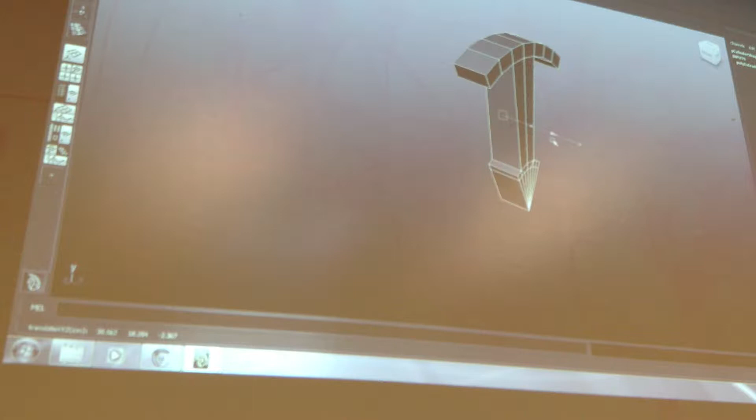I'm going to add just a tad bit of thickness to it. So if I click on just one edge, it'll give me the whole border edge on this one. And just slightly extrude this out to give me a little bit of thickness to work with. Okay? Now when we go and we duplicate this object back around on itself, I want it still to have nothing in the inside. It needs to be hollow.

So any place where it's going to reconnect back to itself, I need to delete those faces. So I'll just get rid of those. Okay. So that's our one section of the rim. Okay? And I also chose the spoke. Again, I didn't choose one that was at an angle or anything like that. I chose one that was perfectly set on axis. Something that I can easily manipulate, staying true to the axis that I want to manipulate.

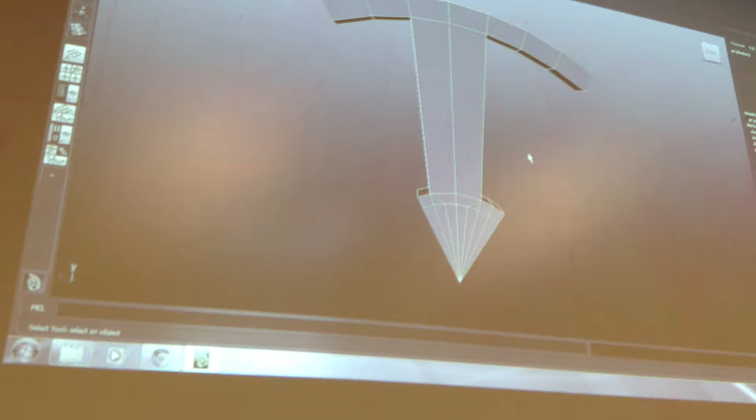So I can add some volume to this moving forward quite easily. If I need to taper it in at all, I know I'm working in a symmetrical manner where I don't have to fight against the world scaling or the object scaling. It's right on the origin. Okay.

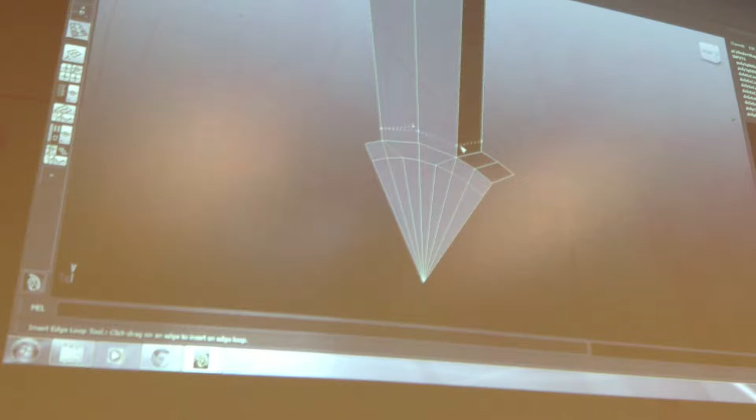So when we go and we smooth this, we can see that's not holding its shape. I'm going to add a few edges in to help it hold that shape. Probably need one right here. Probably one right there. Maybe right there. And maybe you need something like that. Okay? You can see that's holding its shape a little bit better. And I could go and I could do the other side if I wanted to.

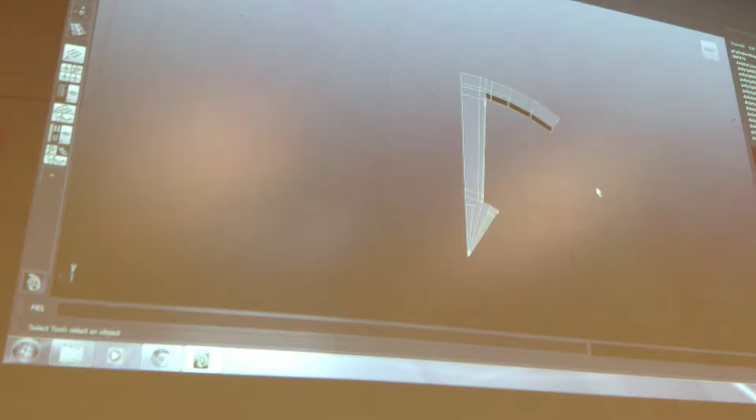Or I could just get rid of this side, and essentially I'm working on now a 1/12 of my rim, right? The only thing I need to remember is when I dupe this to the other side, when I mirror it, I need to get rid of the excess. I need to get rid of one division here, and I need to also get rid of one division here because there's an odd number. So I only need one and two within this area. So these two over here and this one. If not, they're going to be on top of themselves.

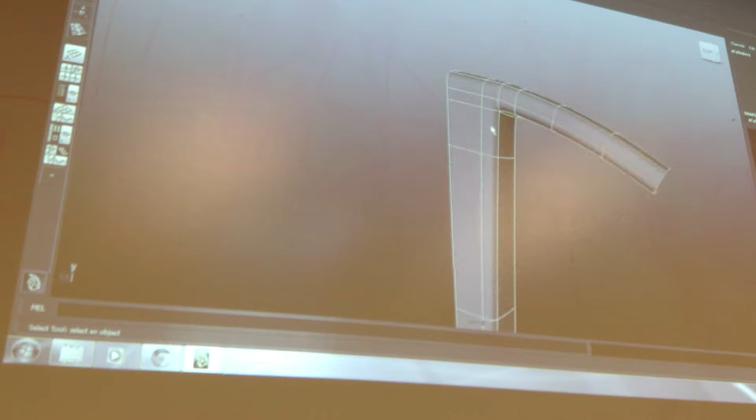Yeah, John. Those vertical edge loops, won't that cause that same problem we had earlier about the roundness? Yeah, so you can already see that, right? You can see that's pinching up there a little bit. You see that's not round right there, right? So what I need to do is put an edge in that will allow me to condense my geometry or de-res it before it reaches that edge. Okay? So if I can de-res it before it hits the arc of the cylinder, it's not going to affect it. So let's do that right now.

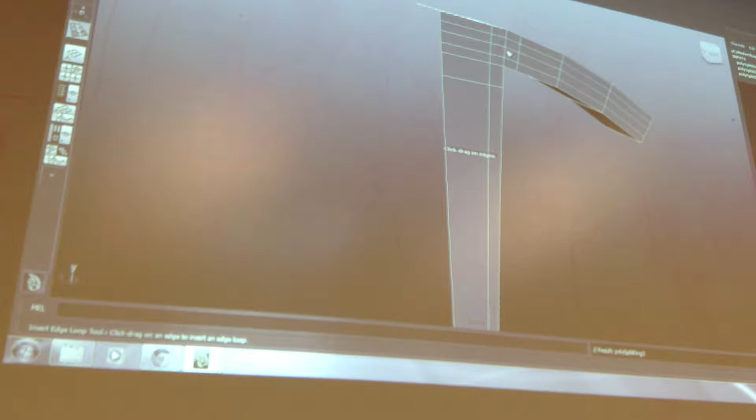I know I'm going to need an edge somewhere in here for it to hold its shape there. At some point we know it's going to need one there, but I need to prevent it from getting to that edge. So I'm going to put an extra edge in the center that's going to allow me to de-res. Okay? This edge here, I don't want to touch. This is allowing it to hold its shape in this area. But this extra one again in the center is a great place for me to collapse my geo.

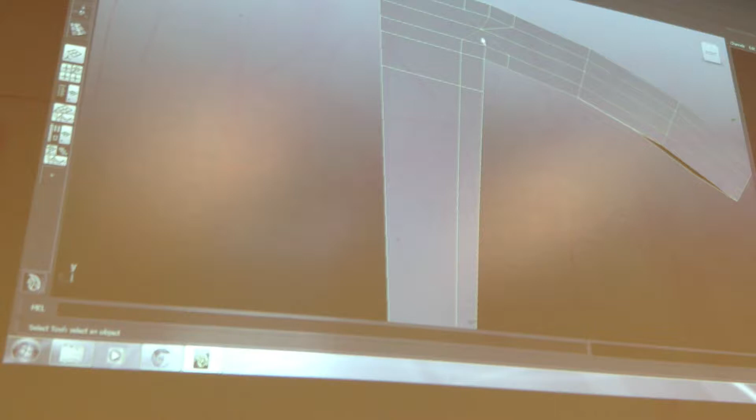Anytime there's three edges along, right? You got three vertices and you have three edges, you can always pinch them together, delete the center edge, which this is a quad, it's just ugly. And then you can easily get rid of the two on the sides. So you've taken three and you've collapsed it into one, remaining quads.

And when you choose which one you collapse to, depending on how your geo's routed, you always want to leave the edge that was there from the initial cylinder, because that's the one that calculated the position it needs to be at, the distance from one to another to actually form a perfect cylinder. So I want to get rid of the ones on the sides. If I kept one of these, it's not going to smooth correctly. So I'm just going to get rid of these. We should notice that should keep our cylinder shape. Okay.

Does that make that good? So where does that edge loop go? The one that's... This one down here.

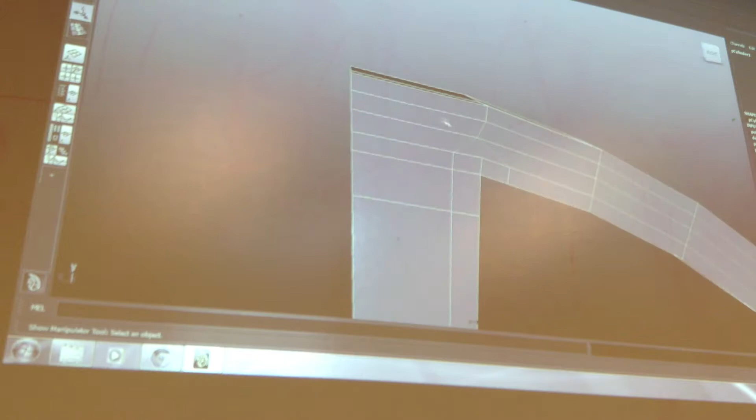I mean, on the top, there's like one up yet. Here? Yeah. That one's just chilling back there for right now. Is there a backside to this? No, not yet. Oh. A lot of times I'll just make one.

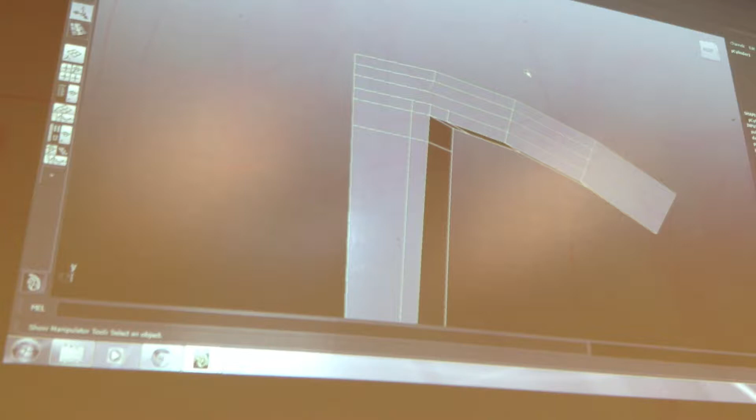Obviously the back part of a rim is a little bit different than the front a lot of times. I'll usually just start with the front, make as much as I need to. At some point I will dupe it and then create the back. That's if you're going to see anything. A lot of times the back is just really this simplified minus some of the kind of extra bling that you might see.

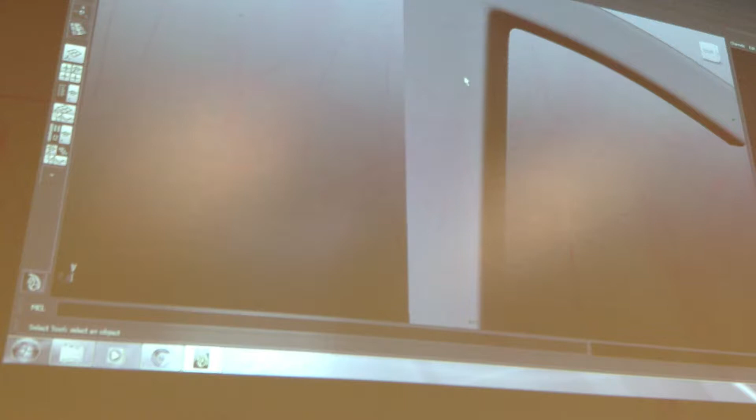Okay, so here we go, we're good there. I could fix this triangle problem here simply by moving this edge here, merging it, and deleting that one edge. Now I got another quad. I'm going to need a few other things. I'm probably going to need an edge in here. And on this, chances are, to soften this transition, I'm going to move this one down a little bit.

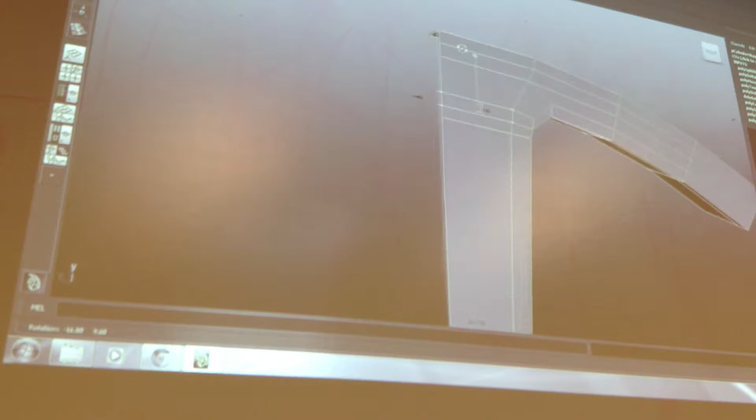That's not going to affect the curvature at all. This is all happening on a flat space. But just by moving that down, that should have a nicer curve than that part of the rim, which is how mine is. Okay. If you want to be real particular about that transition, you can see that those edges did pop a little bit, so I could take that one out and then re-put that edge back in, to give it a little bit smoother transition in there if you needed it.

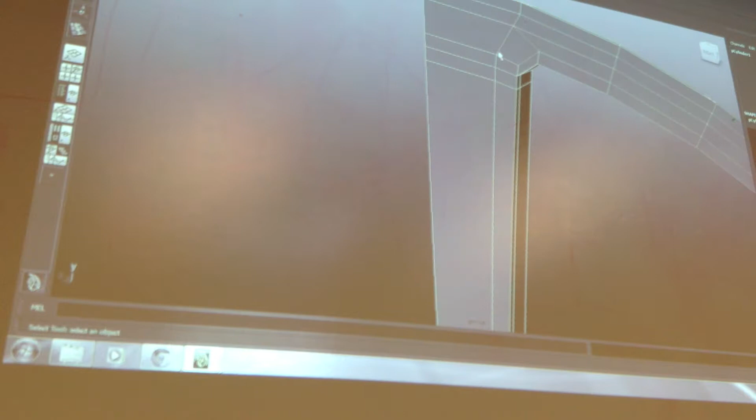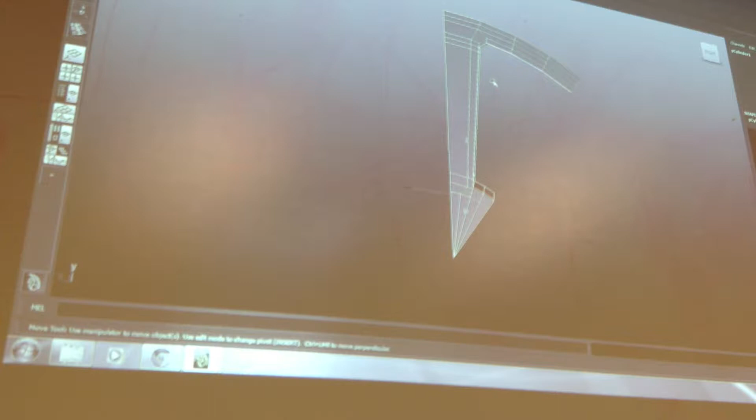Okay. You know, this I don't want to move. Well, actually, it wouldn't matter. I could move this one as well, where I'm going to dupe it, but I think I'm going to just keep all that like that. That's fine. Okay. And what I'm going to do here is I'm going to mirror this and give myself the other half that I needed.

I'm going to go ahead and combine that. And then you still have to merge it and get rid of the excess that I didn't need. So I'm back to 1/6 of my geo. Okay? Again, we probably have some issues there, which we should address.

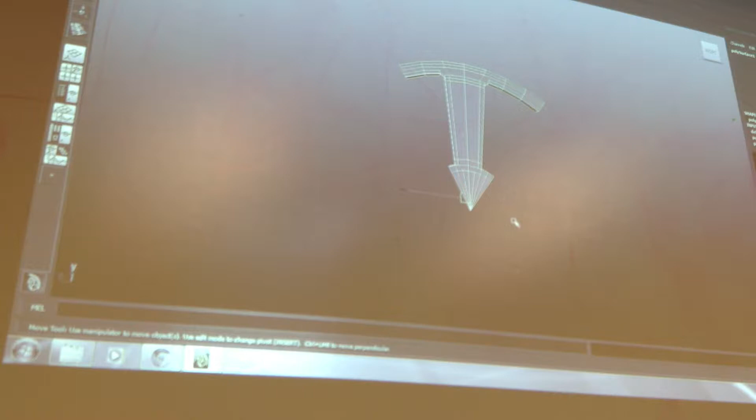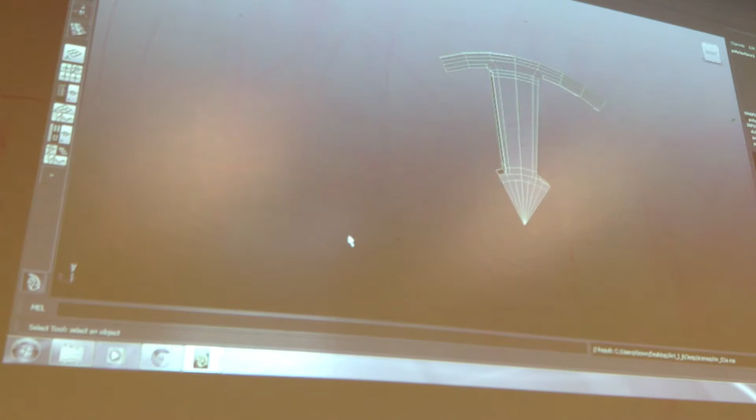I have a question. Yeah, Derek. Why did you delete that one edge on the other side if you've got two? It seems like you made it uneven. I did, yeah, because this here, you'll see, I'll just dupe one. So when I'm putting that around, that 5's an end there. You see what I'm saying? Yeah. So if I left 3 on both sides, because of how it was broken up, I'd have extra faces. Okay.

So I'm going to go ahead and dupe this, and there's a special tool to do that called Duplicate Special. It's just under Edit, Dupe Special, and I'm going to click on the little box. And all you do is, we worked on 1/6 of this. If you had 1/20th, you would calculate 360 divided by 20. Well, yeah, multiplied by pi and cubed or something. It's just however much you worked on, 360 divided by what part you did.

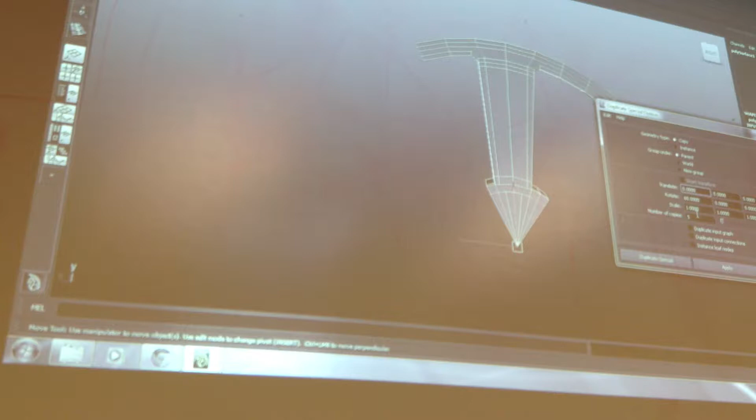Good. So I did 1/6, so 360 divided by 6 is 60, so I put that in the rotation, and you always want one less than what you need. So you need 6, I only need 5 copies, so I type in 5, and I dupe it. Now, these are all separate objects, they still need to be combined.

You do have the option to add them all as instances, which means if you changed anything on the one, it would also update on all the others. Some people like that. I honestly don't like it. I find that I can just work faster this way. But you can do it that way too.

When you're building your games and stuff, nothing really exists in the game space or in the engine. It all exists in a library or folder database type thing, and everything that's in the game is just an instance or a reference of what's in a library somewhere. It's not actually there. Okay.

They're cool if you want to work with them. I don't like modeling with them. Just be aware, probably when you're working in your game engine, that's how it functions. It functions and reads everything as an instance, which is a cool thing. So if somebody changes something on an object or changes a texture, next time you load your level, you don't have to go find the new texture, the new this or the new that. It will just auto-update because this is referencing what was being edited.

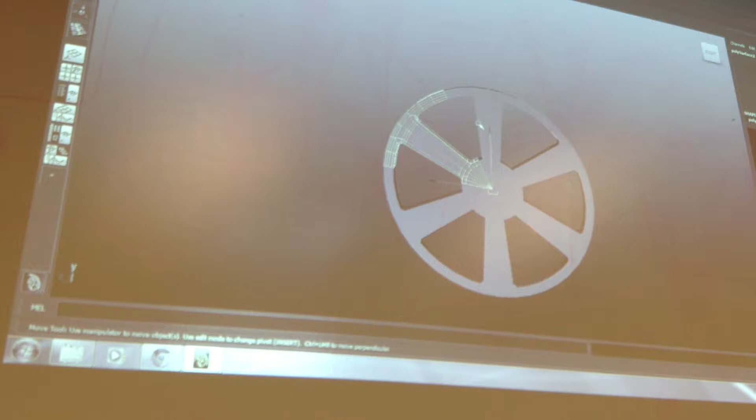You don't even need to know where it's at. Frankly, you probably won't even know where it's at. It's in 20 folders deep somewhere. But you just do it like this. So I'm going to go ahead and combine these, and merge those. Okay.

So you should see this is starting to look pretty decent. It's alright. It seems better. Me too.

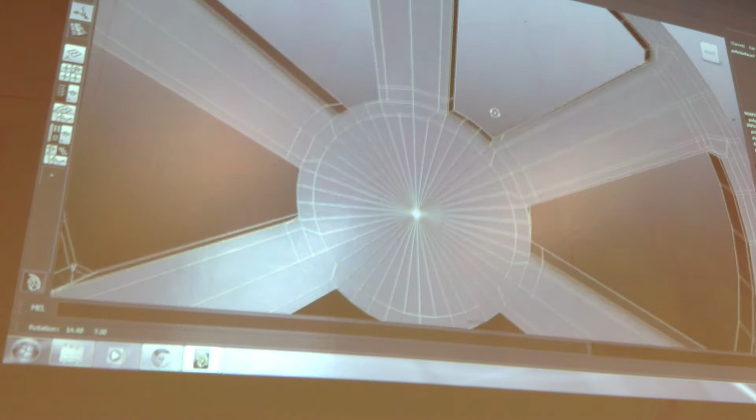The thing is, we can see that this has a little bit of an issue here. I can tell that that's not round. The reason why is I moved this over, so this doesn't have the correct amount of vertices for that arc in there, so I'm going to have to adjust that. I already know that. Okay. I also need to fix this area.

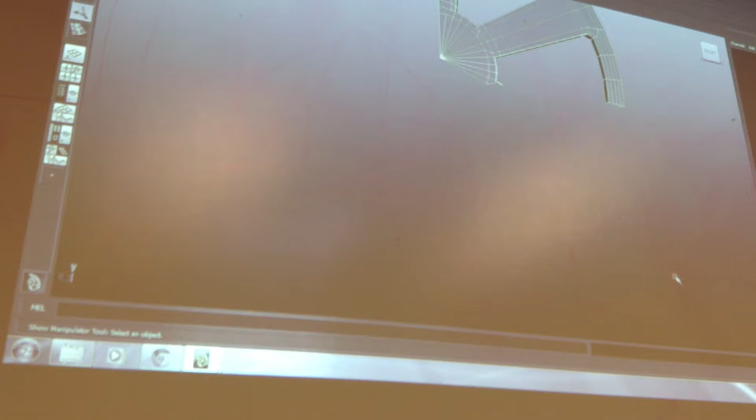But now that I have really what I want, I'm going to look at this probably a little bit differently now. And really what I want is one of these guys. Okay, so now I actually have the part, but I have a different 1/6 of my thing. And the reason why I want this part is I want to do what's in between the spokes, and to get this in here, it's a little bit easier if I have a full thing to work with. I think maybe not. I don't know. We'll see.

And for me, I like to have this thing kind of up where it should be. Even though this doesn't match anymore, I have this vertical, so that's the Assassin's Creed, my Assassin's Creed logo.

It's close, huh? Yep. Good job. Except it's upside down? I think it's upside down. Yeah. I can hardly tell. Just rotate your camera. Yeah.

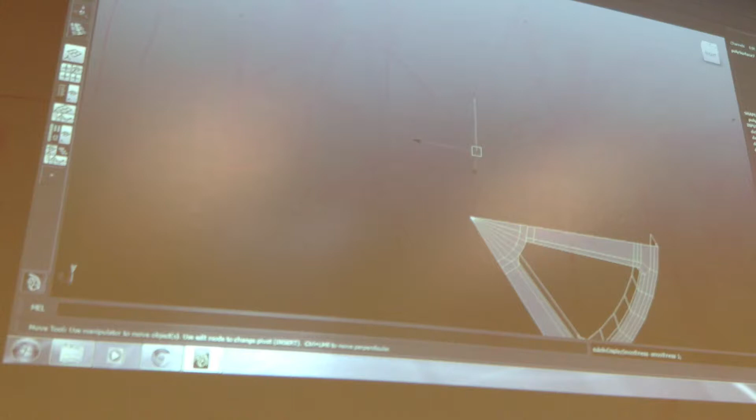So how do you set a pivot point for components? For what? For components? Like if you select a couple edges, how do you set the pivot point for that? Because every time I go out of the pivot point movement, it just resets the pivot point. So if I wanted to move the pivot for these, you just hold D, or you could do Insert and then snap it to where you want it. But yeah, it's per component.

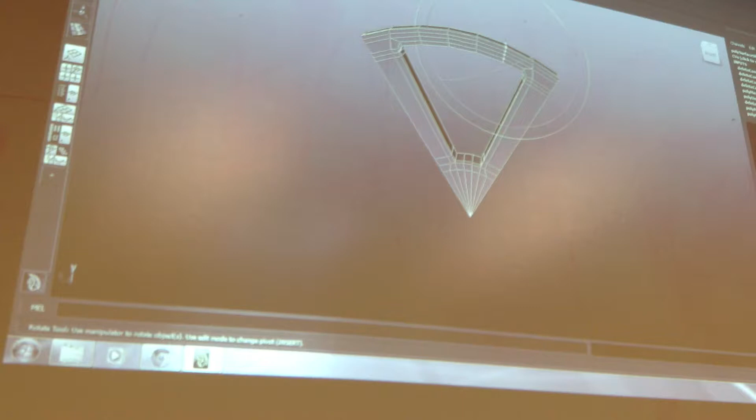So like if you move the pivot point of a component for the move tool, and then you switch to your rotate tool, it's not going to be there. So if you need to move the pivot for rotate, you need to go to rotate first, then move the pivot for that. They're all independent. And if it's acting funky after you do it, because by default it should re-snap back to the center of your selection, just go back into your tool over here and reset it.

Sometimes it gets even more of a problem, like it won't ever go back the way it should, and if that's ever the case, then the only way that I know how to reset it is you just save what you have, close Maya, and then reopen it, and it should be back to its normal function. But yeah, all those component pivots are not linked together. They all function independently.

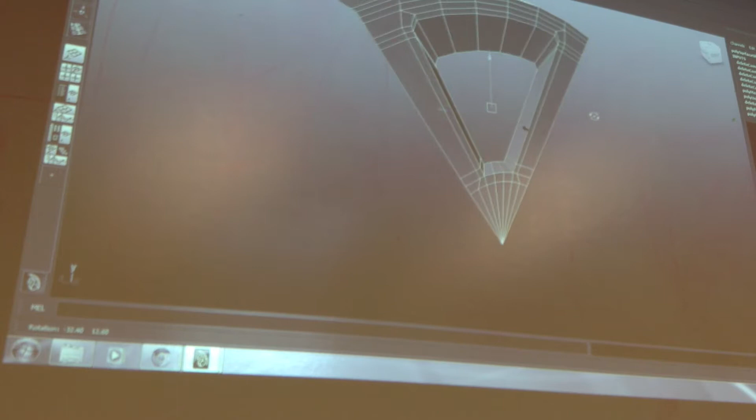Okay, so I'm going to get rid of those and grab this edge and scale this in a little bit. And I think I'm just going to attempt to line this up. Like that works. I think these, once I put that in, that's going to be a little close, so I'm going to get rid of those and just redraw that.

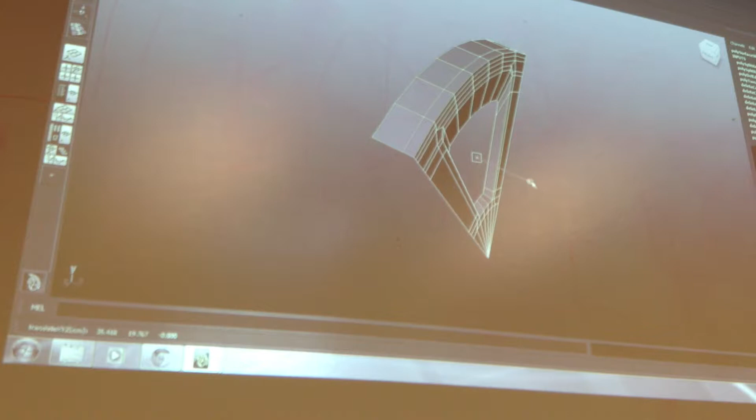Okay, so I just scaled that in to give that nice look. These probably, I'm trying to judge that, probably go back a little bit more. Maybe something like that. I got a bad picture, so I can't really get a full sense of how much depth it has, so I'm just kind of eyeballing it. Same thing applies regardless of what you're doing.

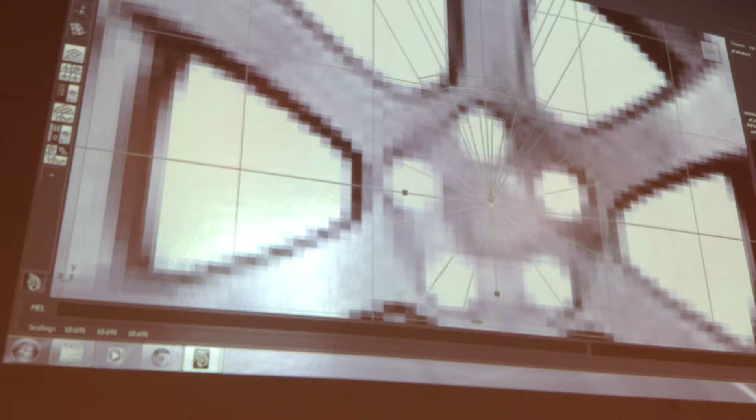I want to bring in a new cylinder so that I can fix that problem. Okay. And I know the issue is on here, so I just need to figure out, maybe it is 30, I need one here. So I just need to figure out how many.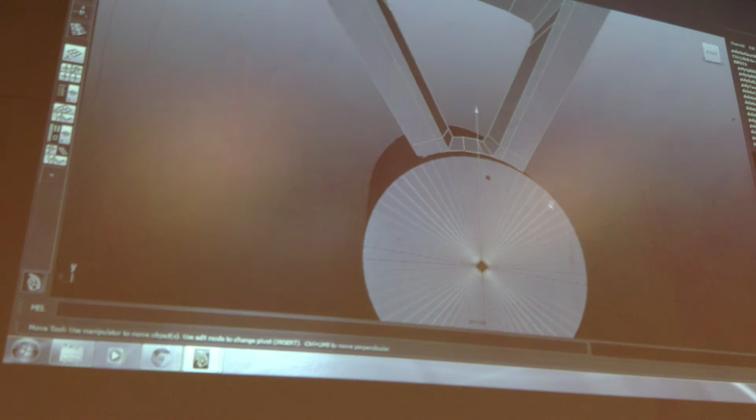And if this is something you want to be super particular about, you literally could take it and snap it to it if you wanted to. I think I'll probably be okay. Oops. And I'm gonna need to split this.

Okay, so I just have this lined up. And again, if you wanted something utterly perfect, you could just snap the vertices to your cylinder that you're using as a guide. Okay. So I'm going to go ahead and split this one down the center.

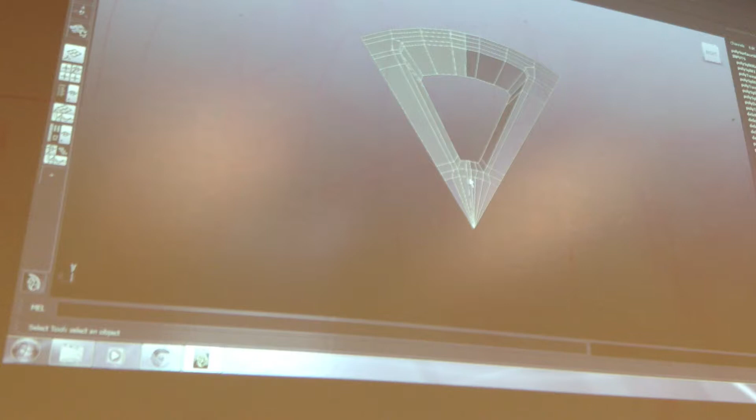How would you do that? The what? The split down the center. I just added an edge utility. So if you select any edge and then shift control right click, edge utility, edge ring splits it directly down the center in between the two.

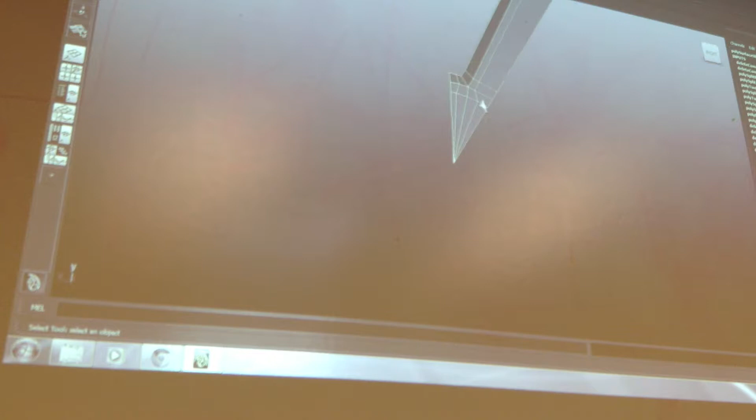I'm now going to get rid of these, and I'm back to. Oops, looks like I deleted something I didn't want to. Pull that back and merge it. So I'm back to what, a 12th again. I'll dupe these. Oops.

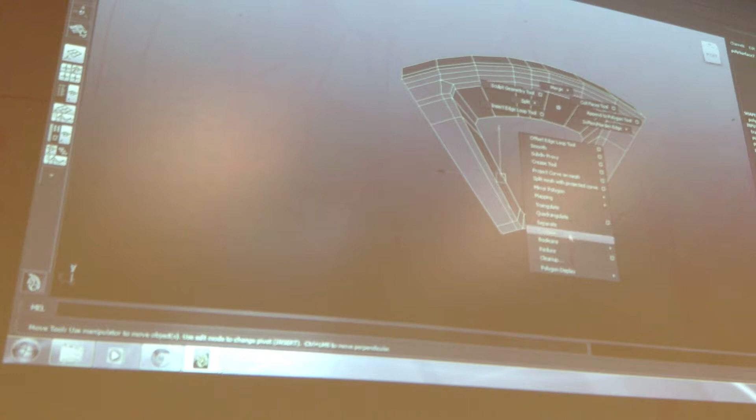I need to freeze that first. It's also rotating. So freeze this first. There we go. Dupe it. There we go. Combine this. Merge those, and then I need to get rid of this edge that I added to be able to mirror it, because that's something that would change its topo.

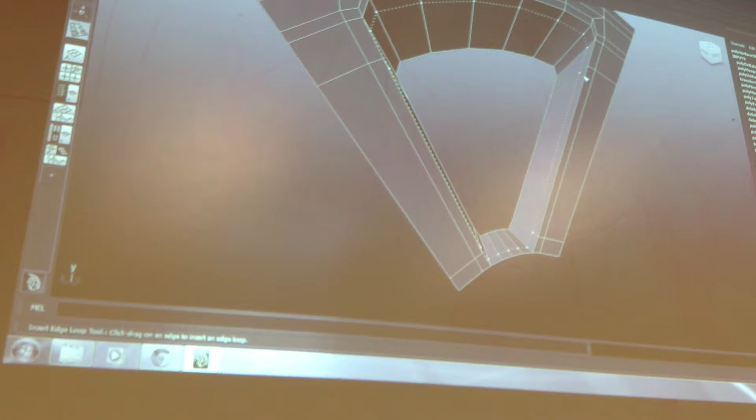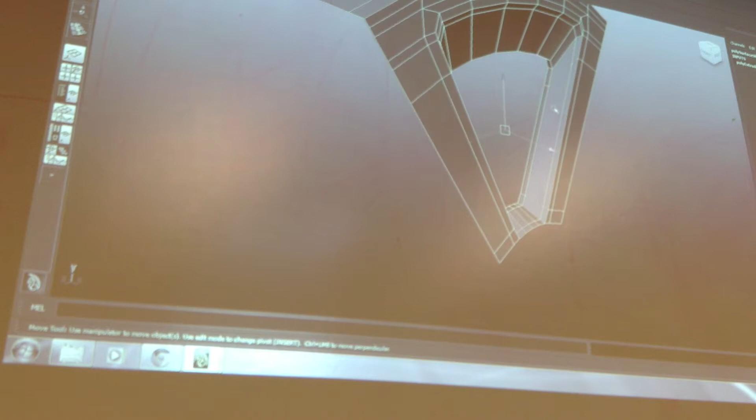I'm going to add one supporting edge right here. I think on mine I'm just going to kind of push that up just a little bit so it's a little bit more prevalent. Right there. You should be able to extrude out, bring out the rest of that rim. Did not need one there. Okay, so that's not too bad.

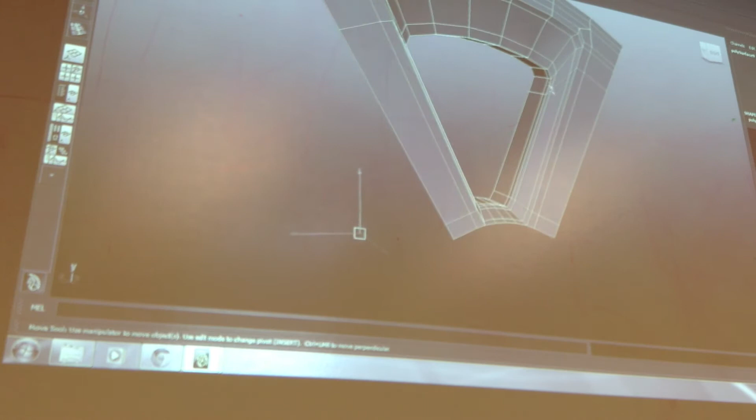Now that I have this one, I think I'm liking this. Oops, I moved that on accident. It looks like this next part, and this could just be the shadowing, does come down a little bit more, so I could bring it down like this, move the pivot here, turn retain component spacing on, and that's going to allow it to keep its shape here.

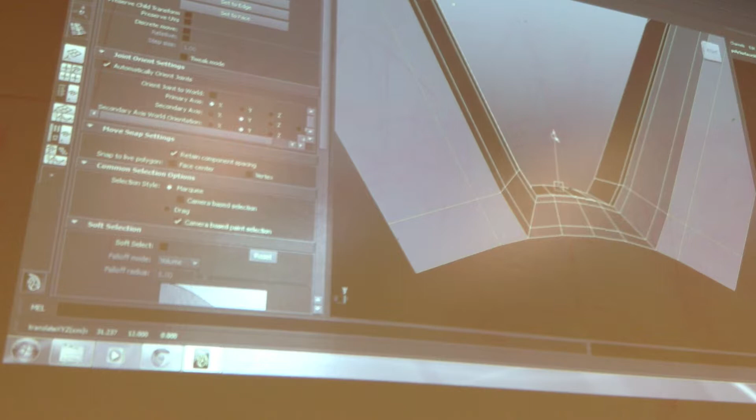So I want it to come down, but I want it to pretty much be planar with that. So it'll keep its slope, but I've moved it all down to match another vertex without having it all fall on itself. So maybe that's something you want to add. I don't know if that's a little bit more. I just eyeballed it. It looks like it's pretty good.

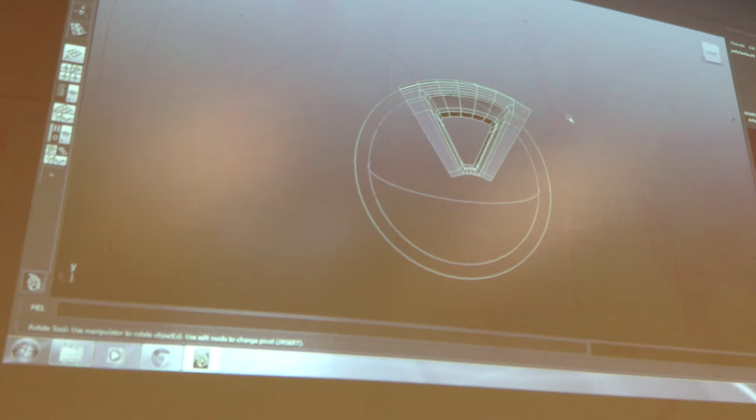Okay, so now that I feel like I have a decent portion of this rim done that I think is probably what I want, I don't need to go back into my dupe special and actually type everything in. It holds the last bit that you put in. So all I have to do is come down and click on dupe special. It'll recreate the rest of it based on the last inputs that you supplied it.

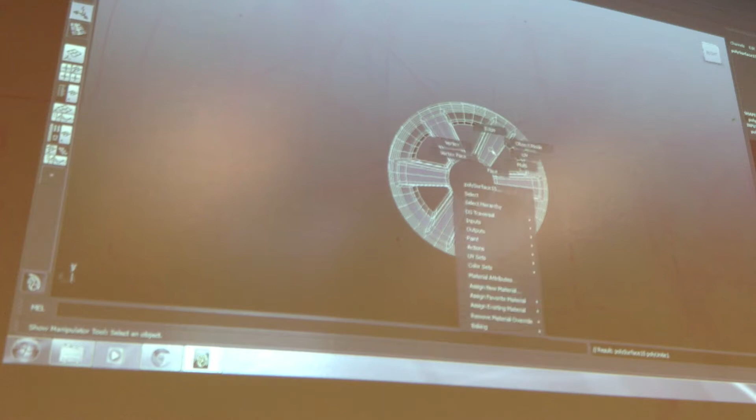Just combined it. Let's merge it. This should all be good. It looks like I'm actually missing vertices. I probably should have deleted that whole thing, honestly.

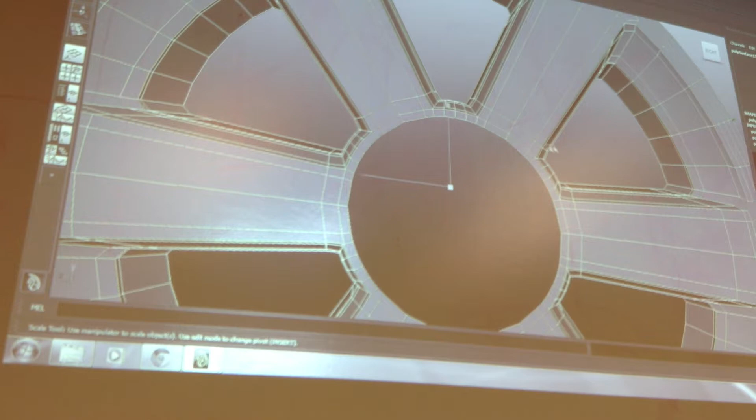So I have this part here, which for here is fine, but if I want to have anything in between, I would need to push this back. I would need to bring in another cylinder and make sure that my edge distribution was correct again. I think I'm missing one part that I wanted to add though. Let's see, rotate this. Let's rotate this 30. Actually, I'm missing before I dupe it.

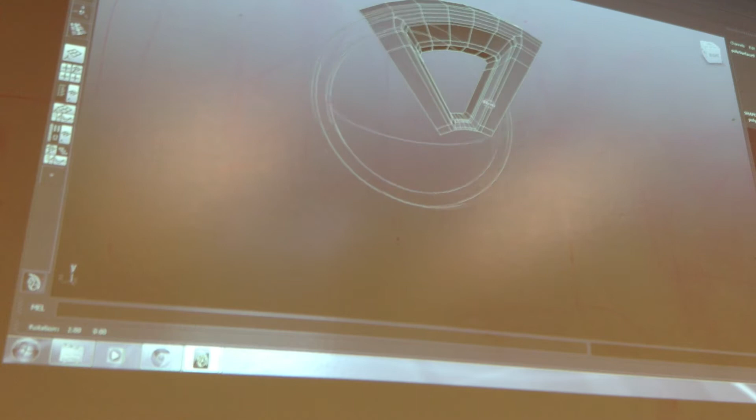No, we'll just do it this way. Okay. Just combine these again, and rotate this back up to 30.

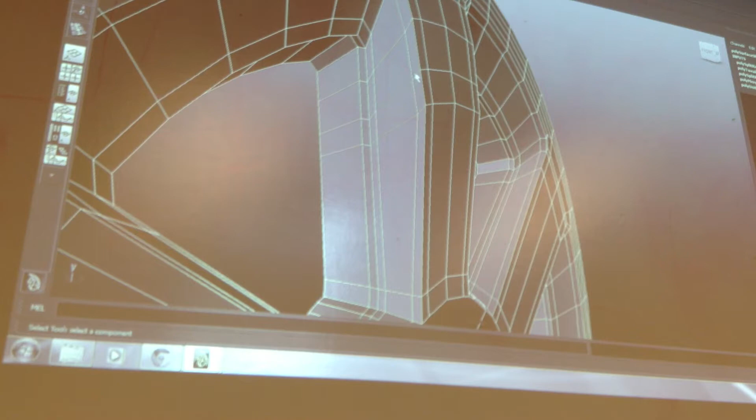Okay, if you wanted to add that cool little part on here that kind of comes out a little bit, I think it does something like that. I just want to grab just this part. I don't want to throw anything off behind it. So maybe it's like this. Okay. Okay, let me test that.

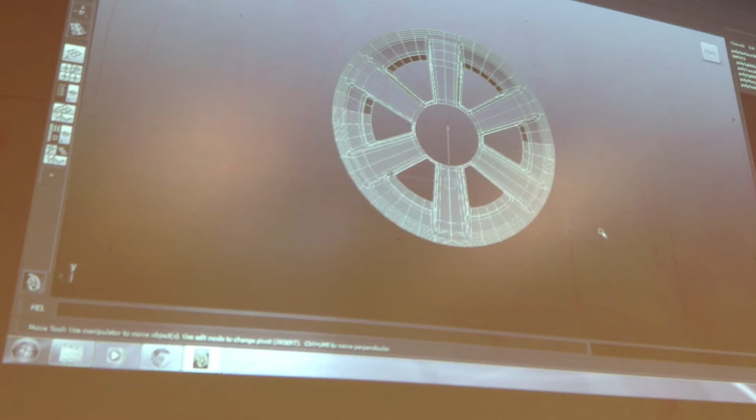Maybe it's just a little bowing action that you wanted to add for some reason. A little bowing action, yeah. And then I have the part that I want, if that's something I want to keep. Same thing, just get rid of the rest. Maybe this would be an actual instance where, if I had copy as an instance on, the rest of the parts would have also added that interactively.

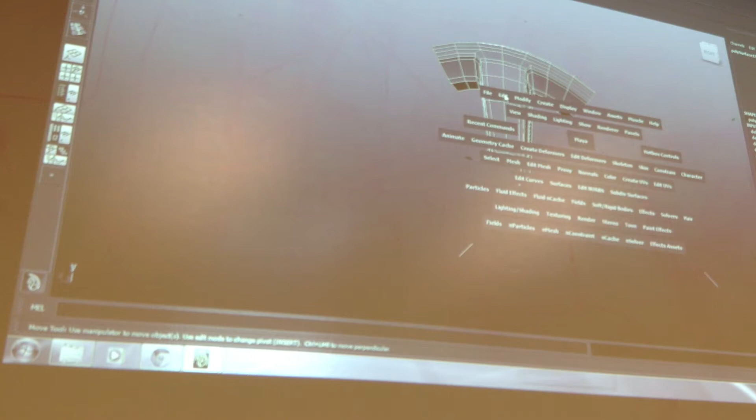At the end, I would still need to combine everything to one object, which you can do. I don't know, I'm just in the habit of going about it like this. It might not be the most optimal way. I think that's right. Duplicate special. Oh, looks like I missed one. Alright, I did one too many.

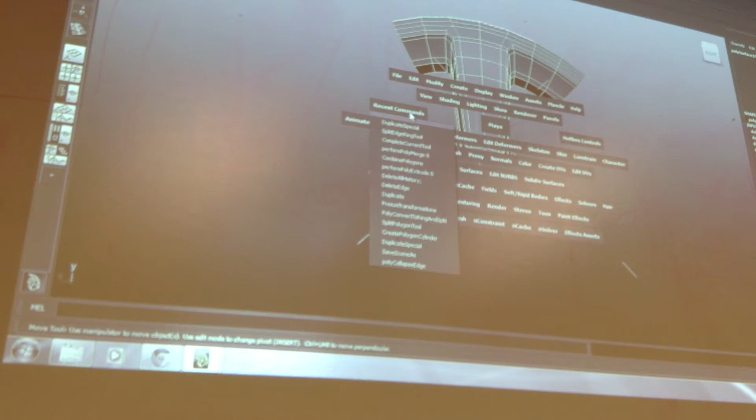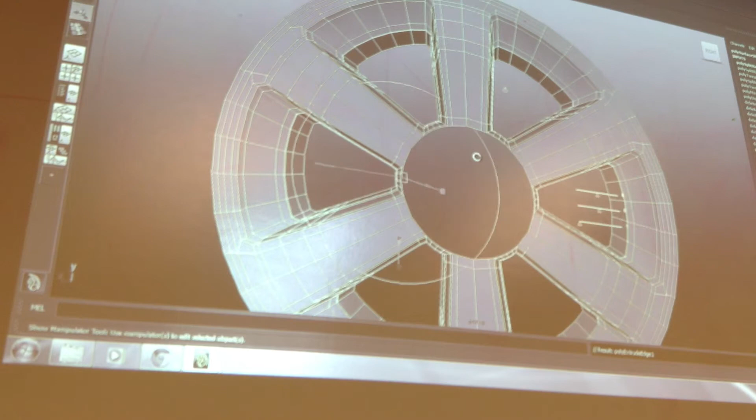Okay, and let's just bring this out just a little bit. We put another edge loop here. Something like that. And kind of shrink this in just a little bit. Probably needs a couple right there to hold it. So the thing is, I know there's going to be some type of cleanup that's going to have to be done.

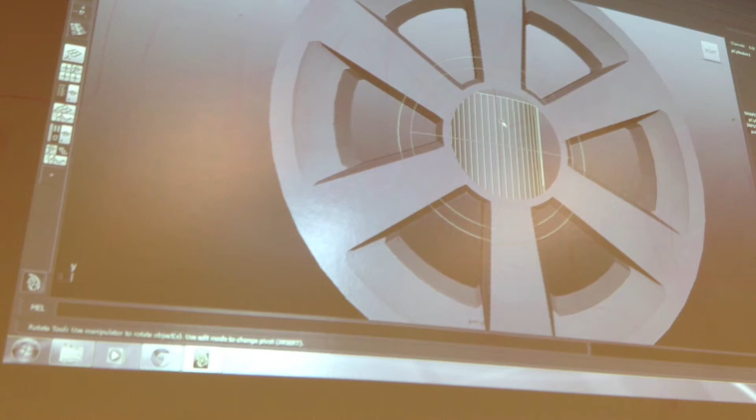I can easily click on an edge, double click, and it'll tell me up here in the corner, I have 48. So that's helpful. I can then just come in and bring in a new cylinder, and I know I need 48. So that's another thing that I use that for. And now I know where these edges need to line up.

So I'm going to go ahead and just click this back. And literally here I just need to grab and put these at the correct points. And I know it's going to be a cylinder again, and the inside. I don't need to do more than half. I can just double click if you have radial loop geometry again. I can select one edge, shift, double click the next one, and it gives me the whole edge.

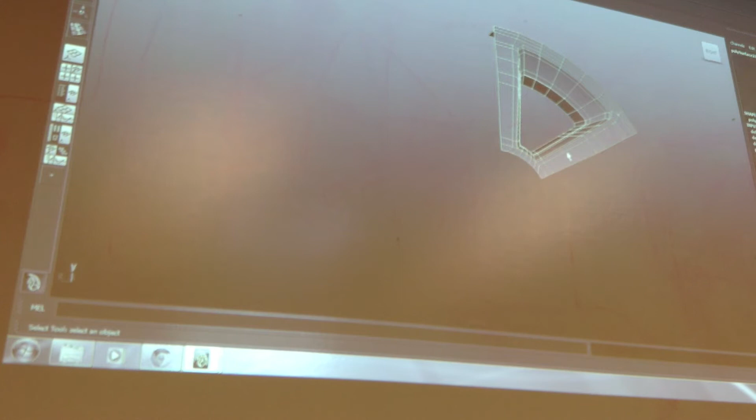Now these are not connected anymore. I can just double click anywhere, it'll give me the whole thing, and delete it. Now I just come back to recent commands, duplicate special, combine them, merge them, and we did all that. So now we know we're back to a perfect cylinder in here that we can use to do whatever you want.

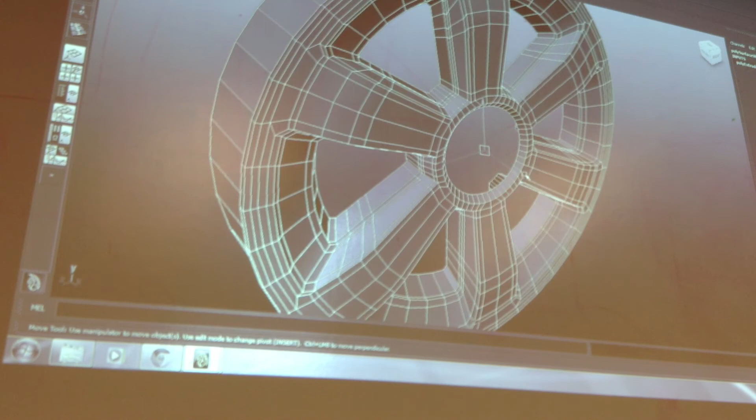Maybe just bring in a little bit like this and bring it on back. Maybe just add a couple cool little edge loops right here to have it hold its shape. Doesn't look too shabby. Cutting in the parts for the bolts and stuff, you might find that you're not able to boolean them.

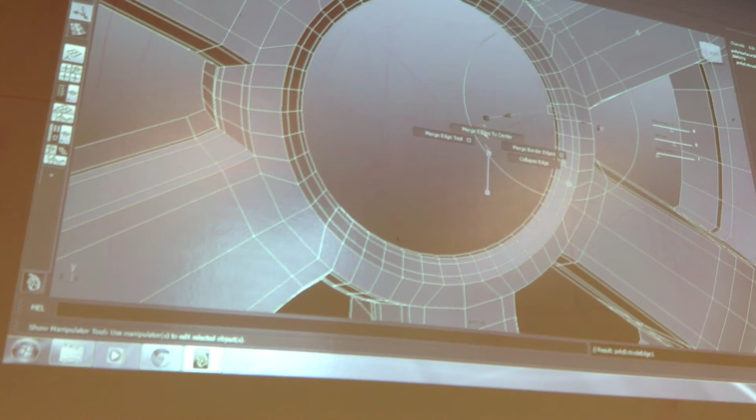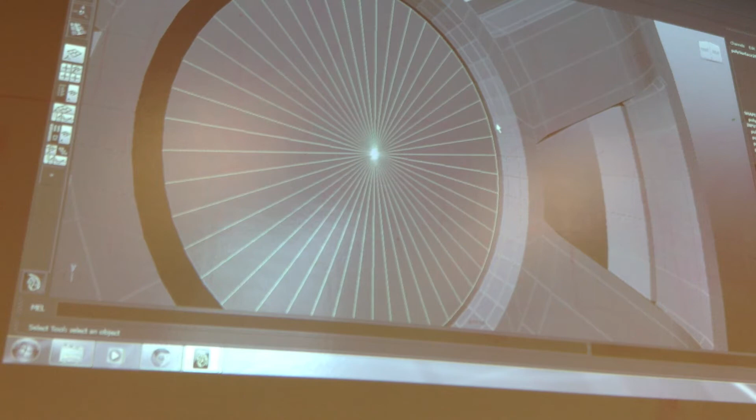So we could extrude, and say you try to boolean those points in and they're not working because it's too complicated. Just select the faces, okay? Extract faces, hit Q. I now have two separate objects. These vertices have to match up. They're gonna match up, I extracted it from them. Just don't touch them, right?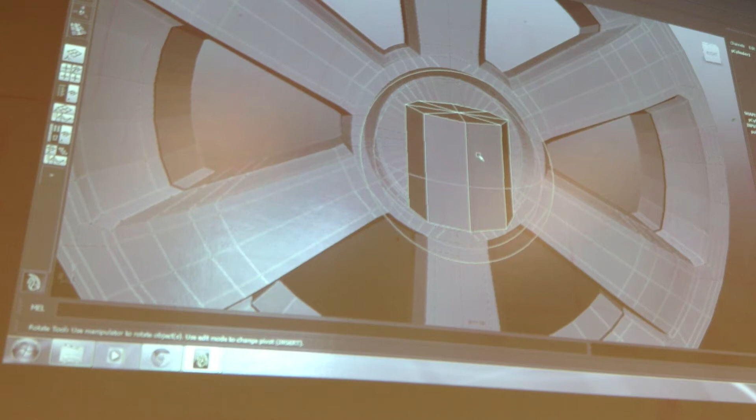So, actually before I do that, what would be smarter for me to do is bring this in. Give myself that, okay? So now I actually have some geo to work with. Bring in a cylinder. Give this something like 8 sides. You only need 8. And let's just try to line one up real quick. Okay, maybe this is where it's at. Okay.

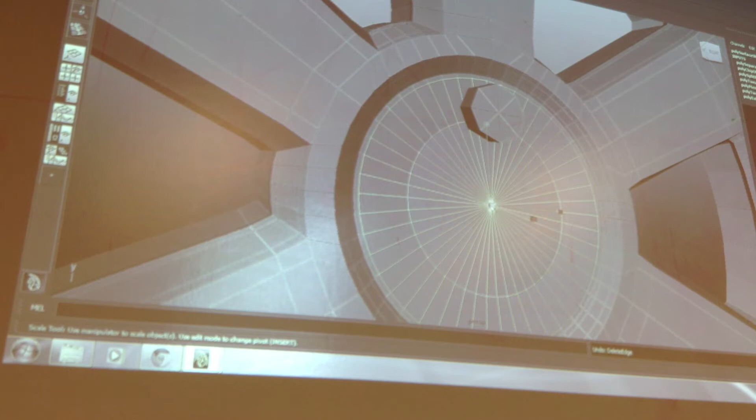So I'm going to bring this in past that because I'm going to have, again, geo for this to be able to connect to. I want to have a place where if I need to continue any type of round area in here, like another indentation or this little nub, I need to have radial geometry to be able to do that. I don't want to ruin it. So let's just see if we can boolean this. Yeah, we did just fine. Okay.

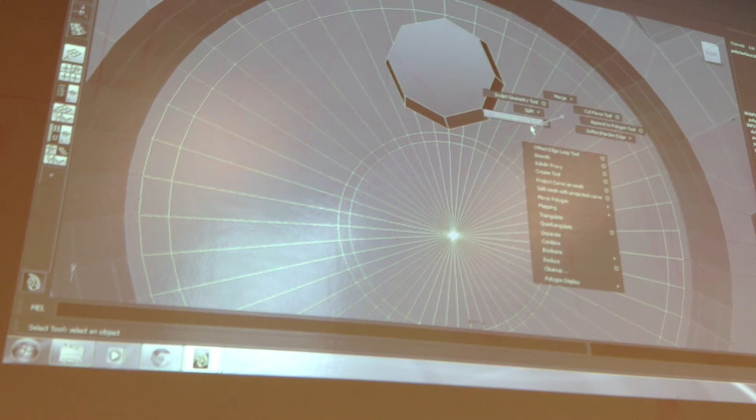And then I just need to fix this up, same thing as we did before. We just need to continue these edges or these lines. Okay, so it's not going to go there, but I can come here and just... It doesn't know how to divide that, but I can just simply tell it when it's past that point.

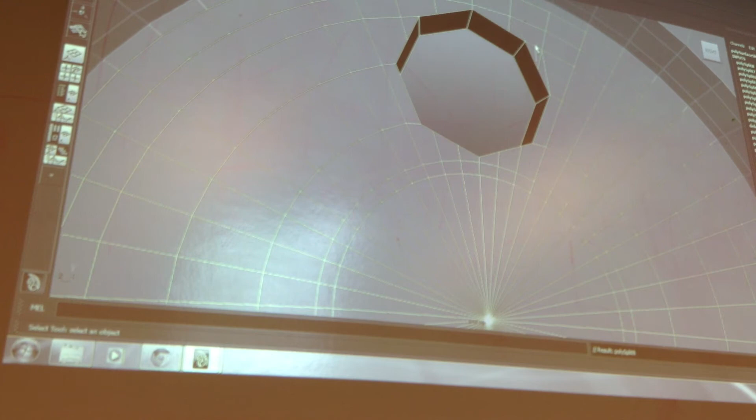Okay. Come in. Clean that up. It doesn't matter where that ends. These are things that don't affect the roundness, right?

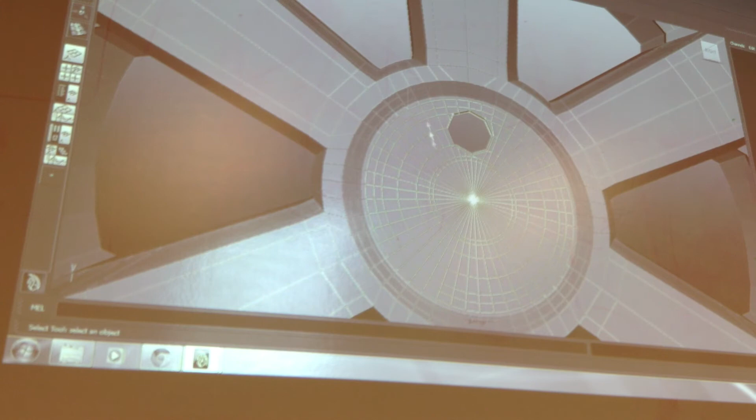So here's... obviously I didn't do the whole other side, but you get the idea. Oops. Okay, so I'm going to take this and delete these faces. I only want to get... be fine.

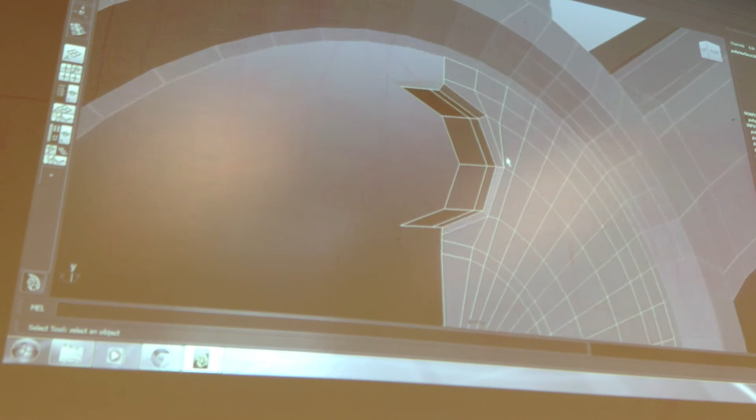And here, you know, we run into the similar problem where we have a triangle. Let's just reroute that. And it looks like we're okay again. So this will be where that takes place. Obviously, I'm not going to be able to do, well, you could. You probably could figure out how you wanted to get it to dupe around.

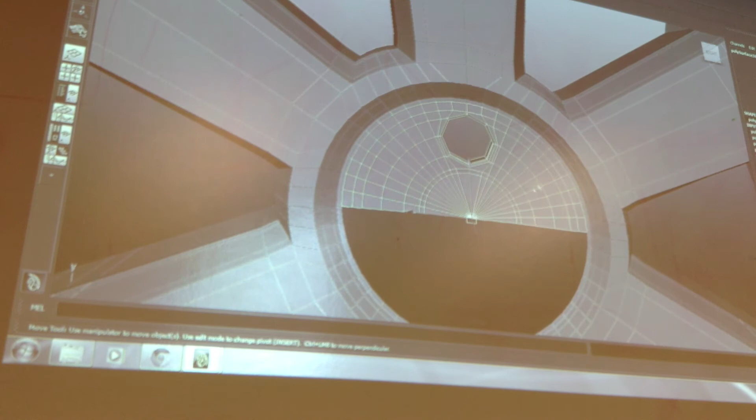If you, actually, I just want, what, negative z? Okay. Combine these. And then we need to dupe negative y. So we got two holes. But it's the same thing as we did on the laptop, honestly, is that you just get this little part right here. Maybe you're going to take it to this.

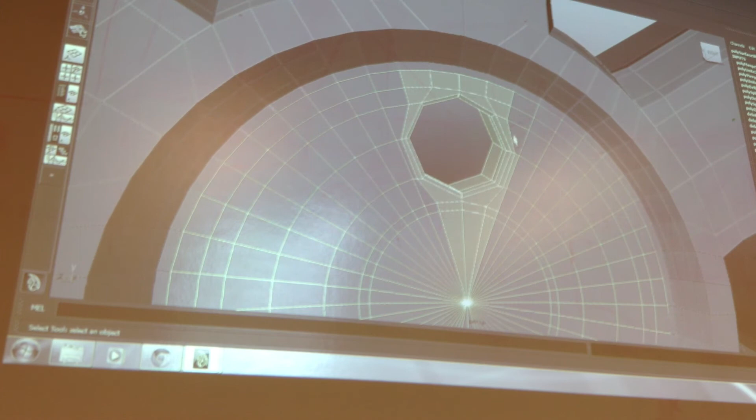So here's this little section, right? And I'm going to go ahead and duplicate those faces. And now I just need to find where this goes off. How many times does 5 go into 360? 72, right? So let's just take this and rotate it 72 degrees. Hit Control D, 72 plus 72 is, what is it? 144. There's the holes.

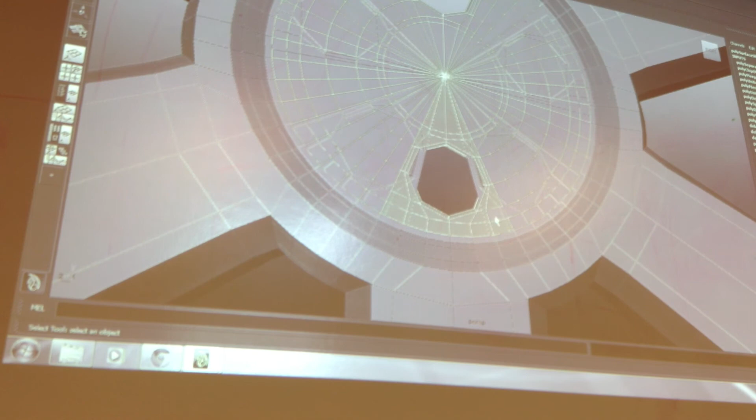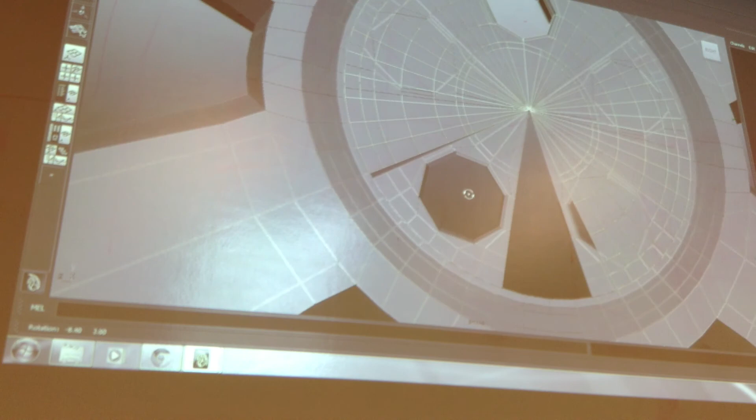This bottom one here we don't need. Let me get rid of this. Okay. So our holes are in place. I keep hitting the wrong button. I just need to figure where these connect and get rid of what's in between. You know, maybe there's a little bit better mathematical solution where I just find out how many I need on each side and rotate it correctly. Maybe that'd be a little bit better, probably. And then stitch it together and you're done.

So, but this would give me my holes. That could be a little bit tricky. Here you have an odd number, but again, I had one thing. I'm just isolating that one thing I want. I'm not going to try to create it 5 times or 6 times. When you're looking at your rim, if you have a rim that has 50 spokes, it's like, oh my gosh, this thing's 10 times more complicated. But the reality is instead of creating 1/6 of something, you're only creating 1/50 of something. So if you look at it the right way, it might even be easier.

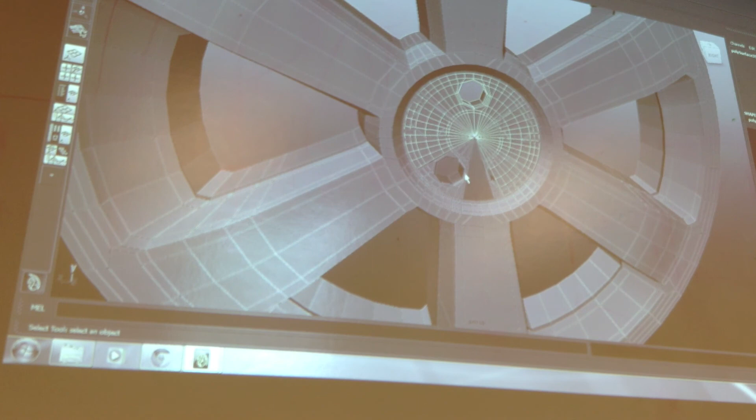So I don't need everybody's rims looking like bicycles now, but just create what you need. There's a thought process to creating these objects. Everyone's going to make something different, rim-wise. The most important thing is selecting the right amount of divisions on your cylinder when you start. If you don't get that right, you're going to have to keep spawning new cylinders that you're re-snapping to get the right distance and position for those vertices, or it's not going to stay round.

So make sure on your initial selection, maybe that takes 2, 3, 4 times, getting the right amount of divisions, so you get the right spacing. So select the right amount, and then from there, just isolate the part that you need. Don't be afraid to duplicate. Keep deleting stuff, so you're only working on a section. That keeps it uniform too.

Cool. So yeah, John. Oh, one second. That's all you got to do tonight, is just make your rim. Tomorrow we'll make the tire that goes on it. And if you've got this part down, the tire's probably a little bit easier.

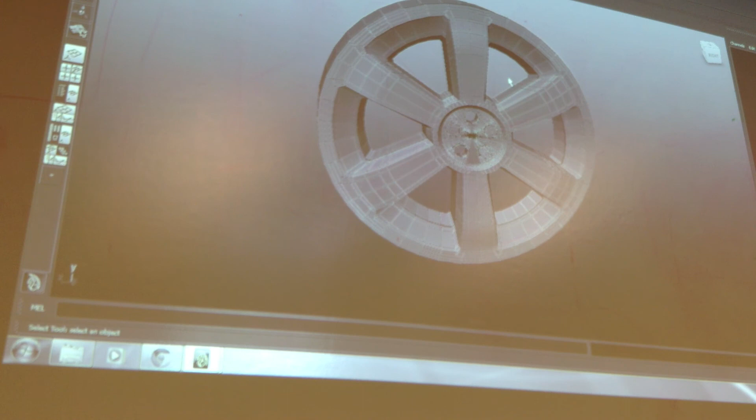So would you be able to double the amount of subdivisions or just control delete the edges you didn't need? That way you wouldn't have to go in and reroute your edges. Because I was trying to work on mine while you were doing yours and I ended up just deleting it because the edges didn't line up. Would it be easier to reduce the geometry when you have too much at first? I don't know, let me try real quick. So say we...